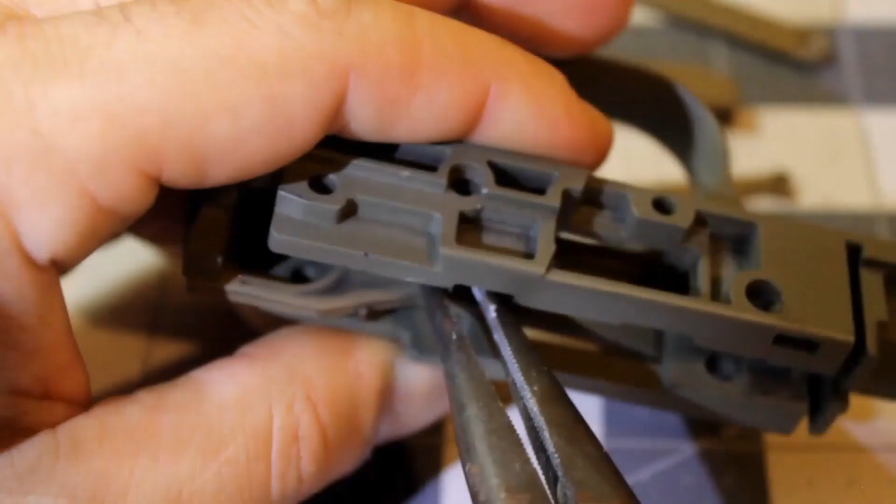Gun Psychiatrist here. In this video, we're going to show you how to do a hole feature. One way to create a hole is to create a sketch and, of course, make a circle and then make the hole manually by doing a reverse extrusion into the existing 3D model. And that would make a hole, and then you could add threads and all that fun stuff. But if you're looking to make a hole with tapers, a counterbore, or threads, there's a lot easier way to do it. But we're going to go ahead and give this a shot.

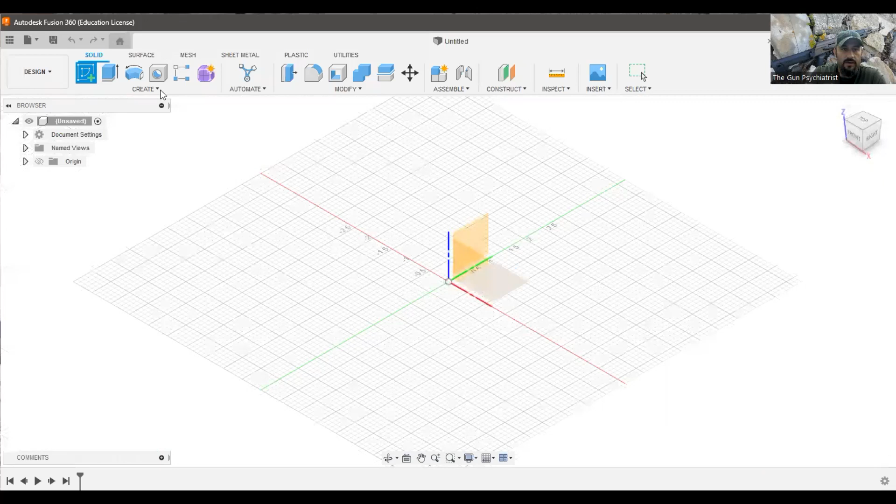And we're going to start with Fusion 360 in a new design file. And we're going to go ahead and create a sketch. We're going to use the bottom plane. We are going to grab a rectangle and we're going to do a center point. And let's make it 12 by 6.

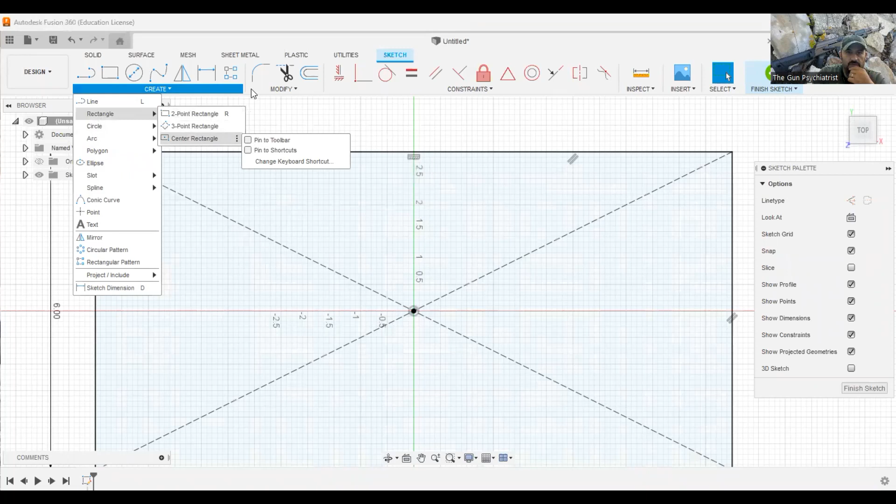Okay. And there's also one thing I want to show you. If there's features that you use a lot, like center point rectangles, you can come over here and go ahead and pin it to toolbar. That way it always shows up on there. So now that we got that done, we're going to go ahead and hit extrude. We're going to come up 3.5 inches.

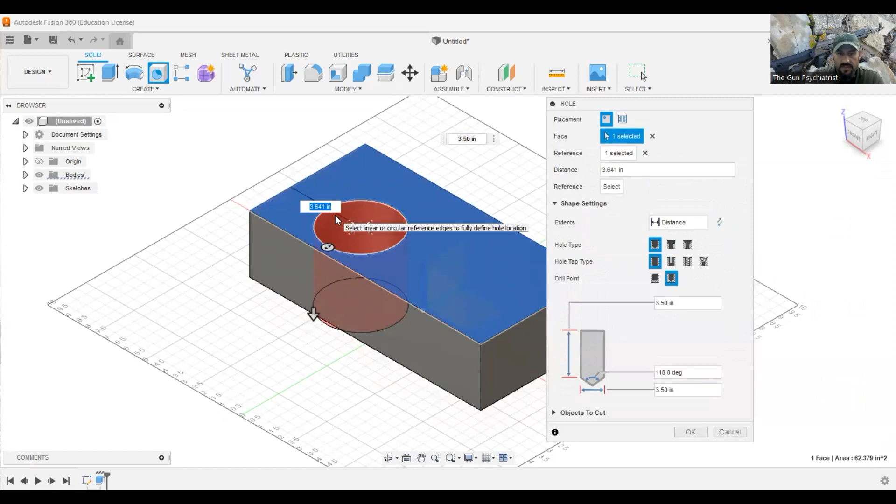Now we're going to use our hole feature. So the hole feature, we can put a hole anywhere we want. And when we look over here at this screen, there's different parameters that we can control with the hole. So one reference is right here. So let's go 0.5. Okay, and then we're going to select this other reference, and we're going to do 0.5, okay? And then for the diameter, which is down here, we're going to select 0.25. Okay, it's going to go all the way through.

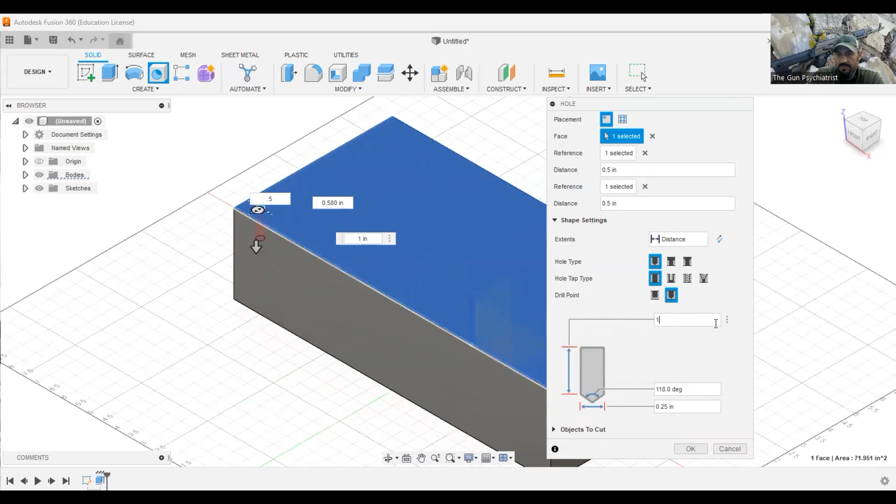Now, we can control the depth of this hole. If we don't want it to go 3.5 inches, we can go 1 inch. And you can see where it would stop. So for this hole, let's go all the way to 3 inches. And that's going to take us all the way to the bottom. Let's take this to 1 inch out. Let's take this to 1 inch out. And let's create this hole. Let's make this a 0.5 inch hole, which would be ½ inch.

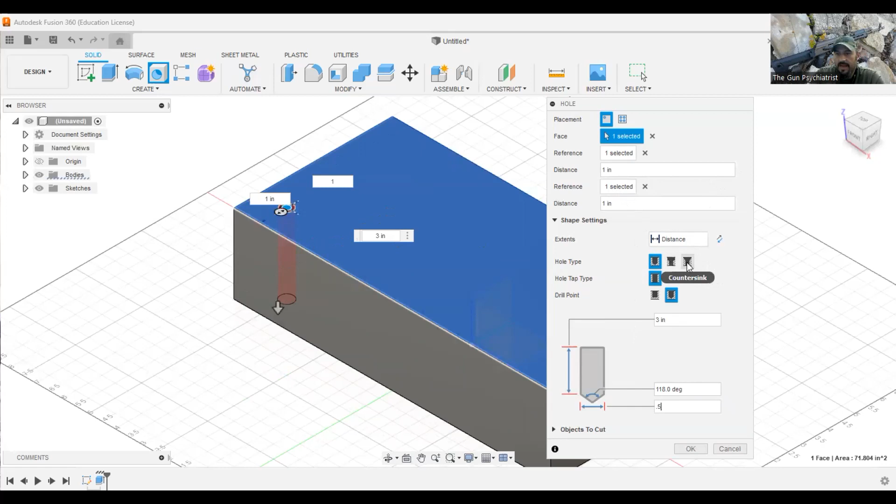Now, if we want to do a countersink, we can start the countersink right there, and this will control our countersink parameters. So we can say the screw we're going to use in the countersink, the maximum diameter of the screw head, say that's 0.75. That'll control that. And then we can say it's a 60-degree screw angle. So we can do 60 degrees. Okay, and it'll change that all for us.

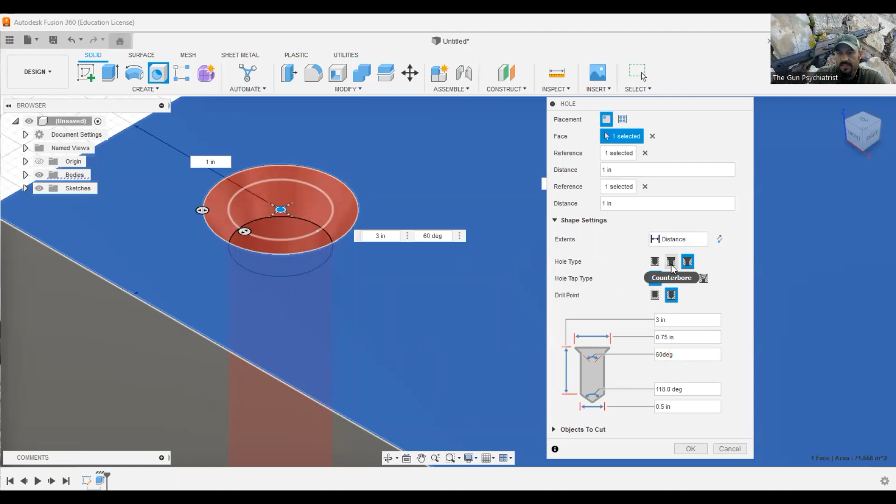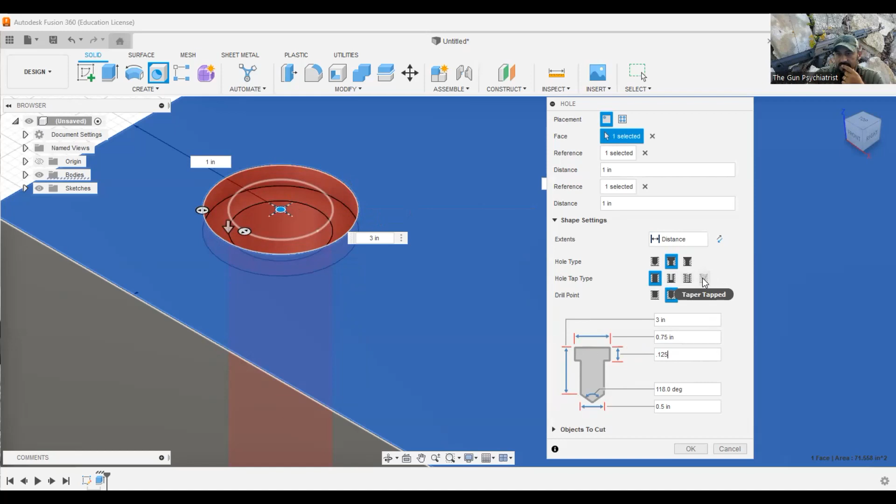Same thing with a counterbore. If we need to counterbore it and say it's 0.75 counterbore, and we want to come down an 1/8 of an inch, 0.125. Now we have a 0.125 counterbore. So here we have an area that we can tap screws and stuff. Okay, so if we want to do a tap here, to use a taper tap, you'd have to have a tapered hole. So for the threads, we're going to come down here.

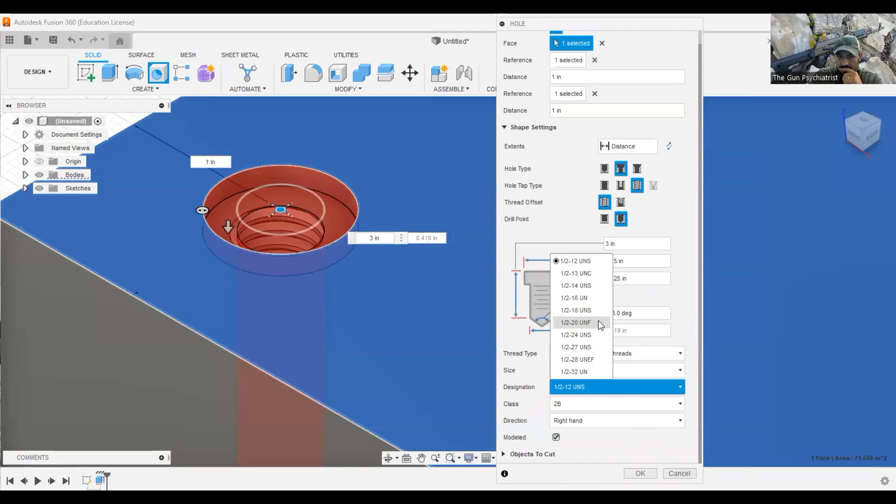This is a ½ inch hole. So we're going to go to ½ inch. We're going to model these threads because we want them to look accurate and real. Unified screw threads, ½-20 UNF. So that's a fine thread, ½ inch 20. Let's drop this down to 0.25, ½ inch down, going all the way through.

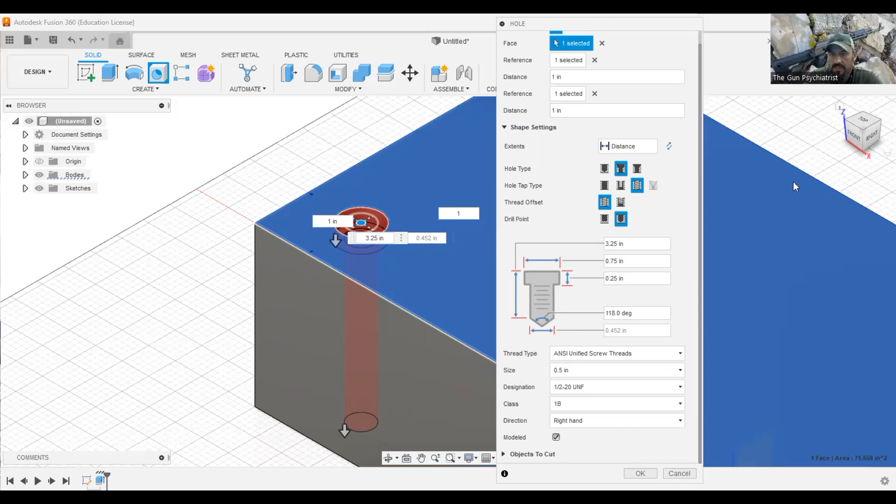Sometimes when you're machining different parts, you're not going to go all the way through, sometimes you might, but in this instance, we're only going 3 inches from the top to the bottom. So we're not all the way through because we have a ¼ inch added on here. So if we were going to go all the way through, we just have to do 3.25 like that. And this will let us all the way through. Okay, so you see we're all the way through. Sometimes you're just going to use an end mill because an end mill is flat. It's just going to make a flat hole feature at the bottom of that hole.

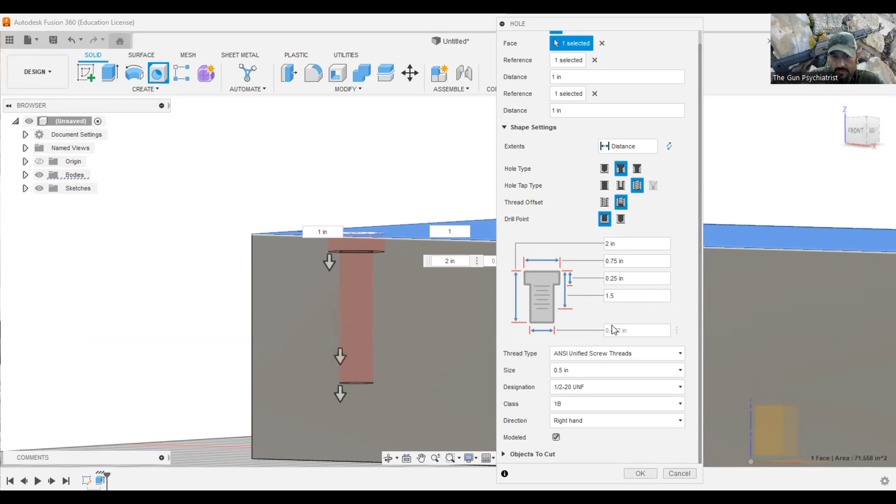Then there's also a way when you tap threads, you can select there to be an offset. And so let's call this 1.5. Okay, you can barely see it right there, but what that's done is ran threads down for 1.5 inches and then left the rest bare.

And this is good for any type of an indexing screw or set screw or something like that, where you're going to have threads and it's just going to taper off into a smooth shank and go in a hole and maybe pin something else together. That's what you can also use this feature for. Or maybe you just don't want to run threads down that far because the fastener you're using is only maybe an inch long, but you need a 2-inch deep hole for certain reasons. So that's how all that works.

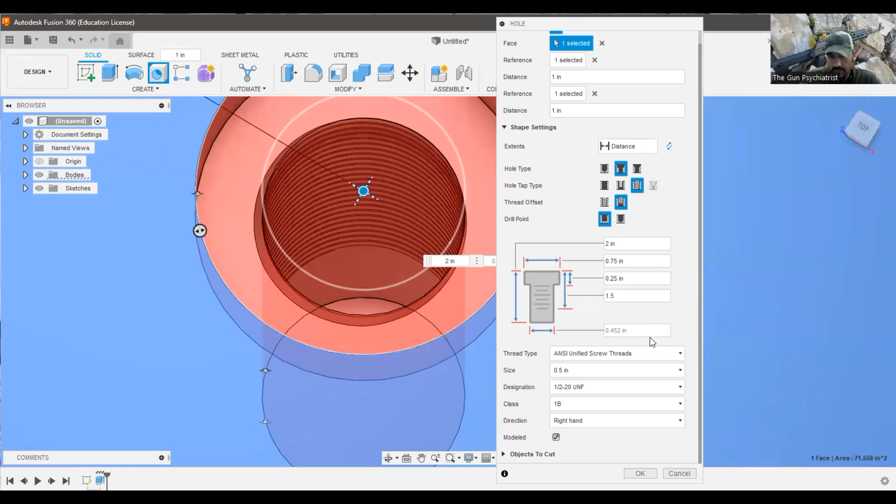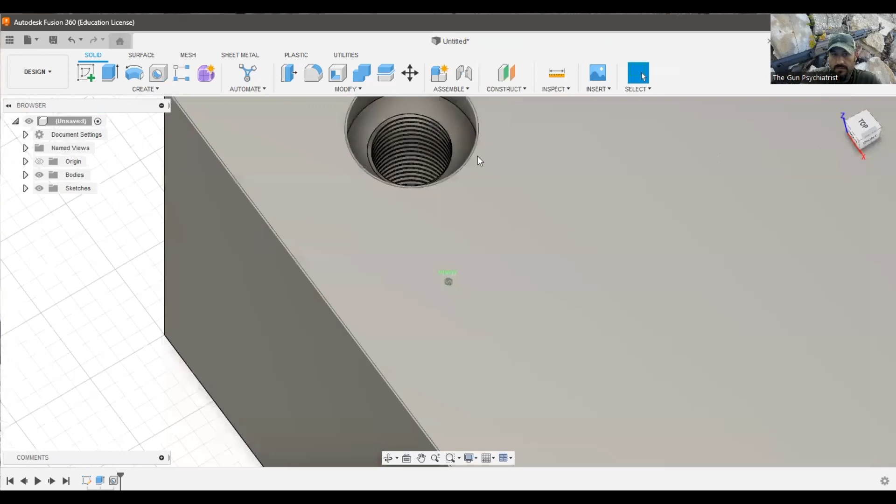But we're just going to go and run a tapped hole. We're going to tap it all the way through. We're going to go 3.75 to the bottom. So we have full threading all the way down. Let's go ahead and check that. There we go. All right. We're just going to hit OK. So now we have this feature in here.

If we need to smooth this out or place a small chamfer, because usually when you create a hole like this, you are going to get some metal that's going to splurge upward right there. So let's call that 0.0625. Okay. And there you go.

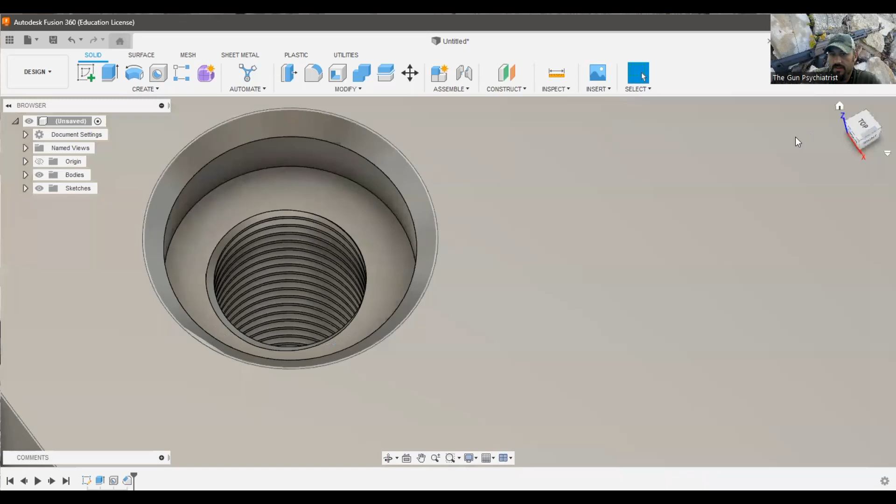So in this video, you saw how we use the hole feature and got a full explanation on all the different aspects of the hole feature, the different threads we can put in, the different bottoming shapes, whether we're going to do a taper or a flat shape if we're not going all the way through, how to make it go all the way through, and of course, different taper angles and all that fun stuff.